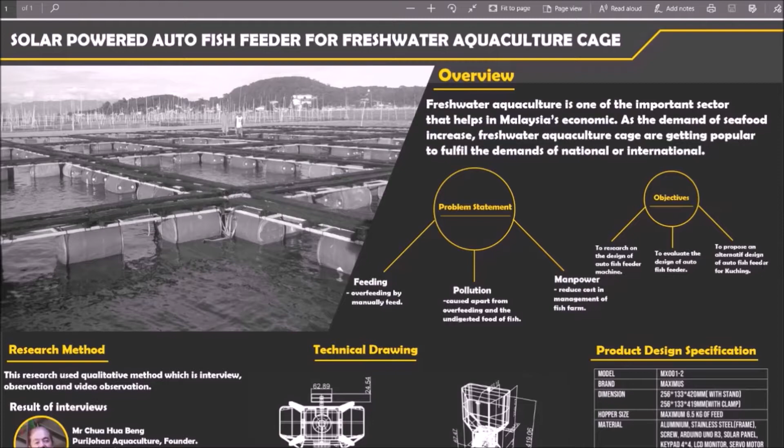The objective is to research the design of the autofish feeder. The second is to evaluate the design of the autofish feeder. The third is to propose an alternative design of autofish feeder for Kuching.

For the research method, this research used the qualitative method, which is interview, observation, and video observation. So I interviewed 3 interviewees, and this is the result.

The first is Mr. Chua Hua Beng. He is the founder of PuriJohan Aquaculture. He said the design itself has to be low cost because his farm is quite big.

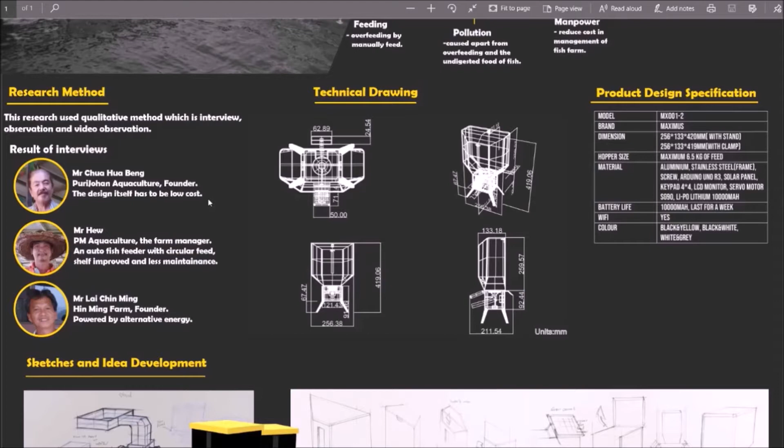The second is Mr. Hew. He is a farm manager for PM Aquaculture. He said an autofish feeder should have the circular feeding function for the fish fry and shelf improvement, and it should be less maintenance.

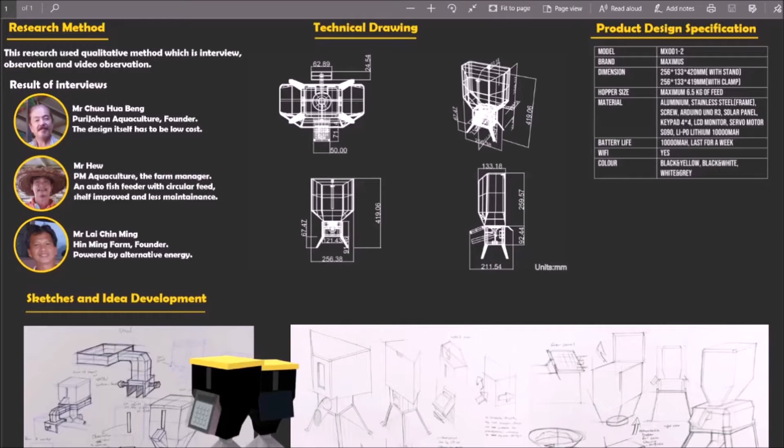And lastly, Mr. Lai is the founder of Hin Ming Farm. He said the autofish feeder can be powered by alternative energy such as solar energy.

Next is a technical drawing. As you can see, it has 4 different viewports: top, front, perspective, and right. All of the viewports are separated by the dimensions in mm.

The next one is the product design specification. For this model I named it MX001-2, and the brand itself is Maximus, because I want this product to maximize itself to the user.

For the dimension, the stand is 256 by 133 width by 420 height. With the clamp, the gauges differ in height by 1 mm, 419 mm.

For the hopper, it can fit 6.5 kilograms of fish feed, and the material of this hopper is aluminium because it's easy to shape. The stainless steel is for the inner frame because it has a stronger property.

Screw, Arduino, solar panel, keypad, LCD monitor, servo motor, and lithium battery. The battery life is 10,000 mAh, and it can last for a week.

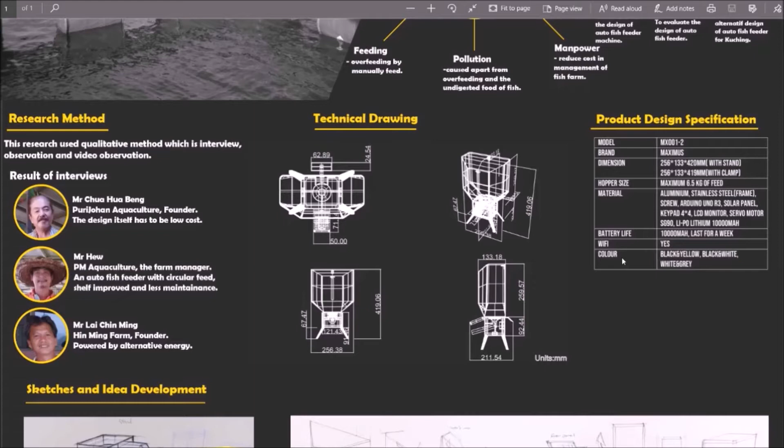Comes to the last part of the infographic, that is the sketches and idea development. This is the first sketch that I proposed, and it was rejected because it doesn't look attractive and it is rigid.

The second sketch: the researcher did research on the drag coefficient of shapes. The lower the drag coefficient, the more stable the product is in windy environments. The result showed the hexagon shape has a lower drag coefficient rather than the square or the cube, so that's why I tried to design the hopper as a hexagon shape.

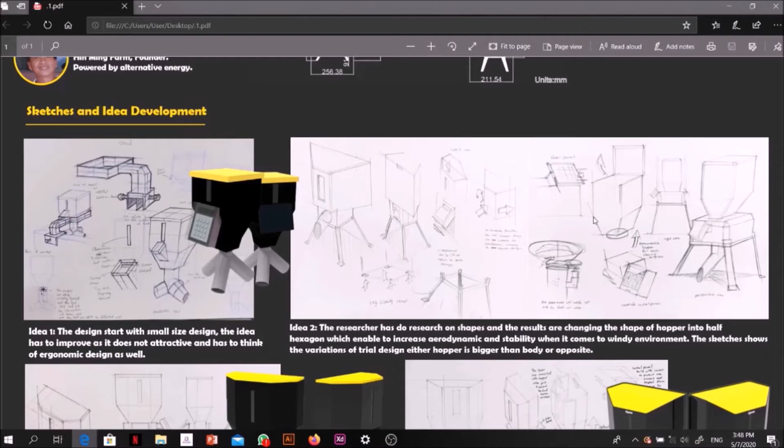The third sketch, I tried exploring what kind of features can be added to an autofish feeder. Comes to the idea three, it's a combination of sketches 2 and 3. As you can see, the design has been improved into a more simple form, but it still looks rigid and has to be changed to more organic modern and a practical design.

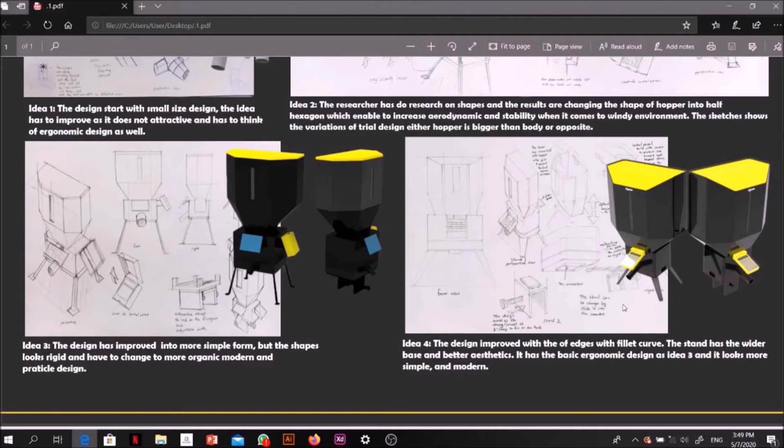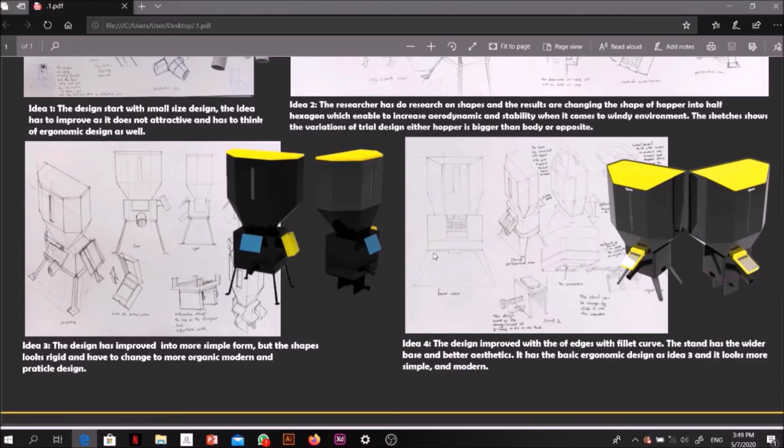Comes to idea 4. Idea 4 inherits the characteristics of design idea 3. It's improved with edges that have a fillet curve, so it's not hard edges, so it looks more organic rather than cubic. It has the function and basic ergonomic design as idea 3, and it looks more simple and modern.

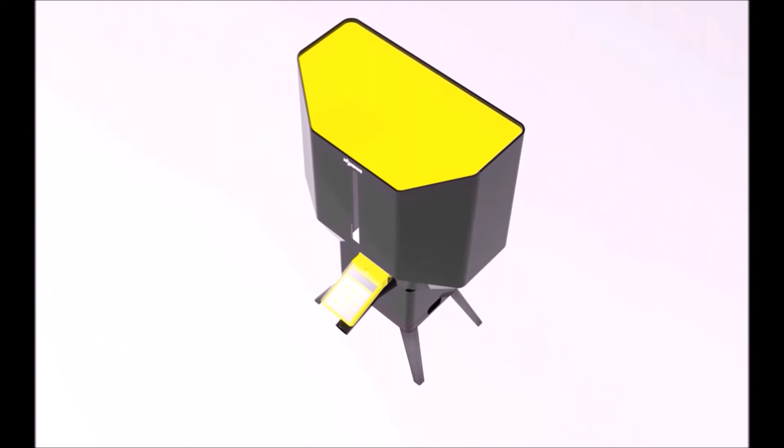This is the overall view of my design from top to bottom. This is an exploded view for the hopper, control panel, body, and the leg.

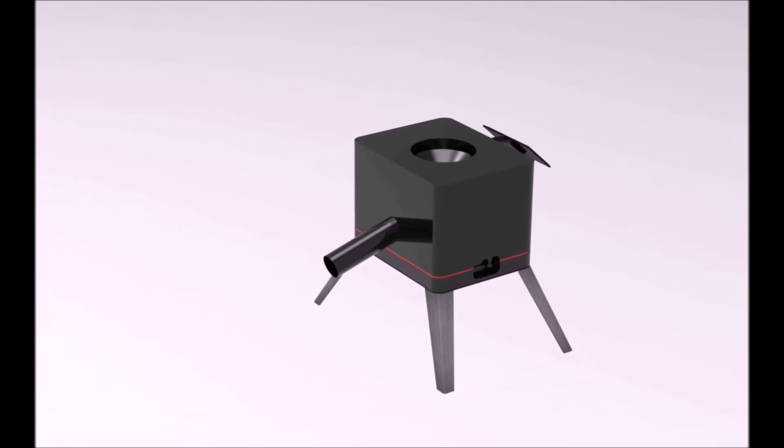Firstly is a hopper. As you can see, the cover can be opened and the middle has a window for food observation, and the hopper is detachable for easy cleaning purposes.

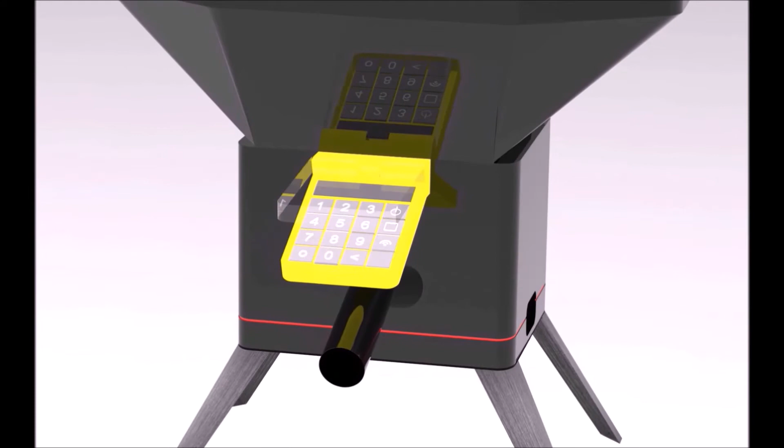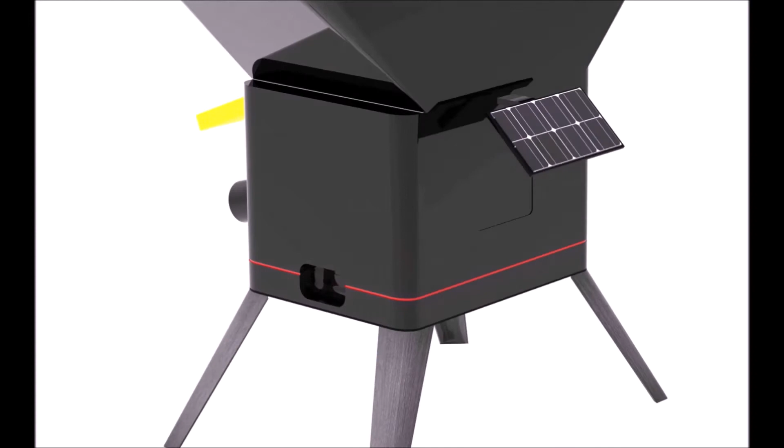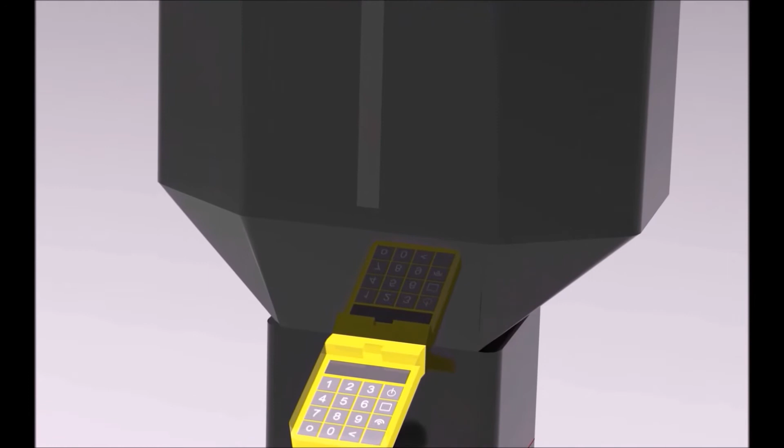This design comes with two types of stand. The first type is a standing still stand, and it's very easy to assemble as the video demonstrated.

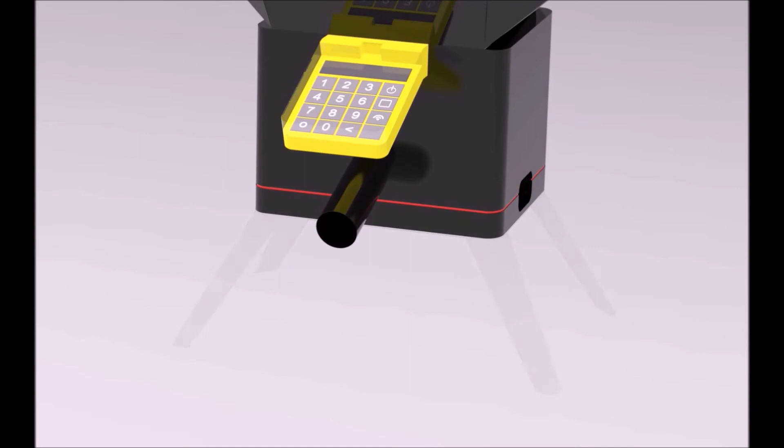The second type of stand is a clamp. You can clamp it on the fiberglass tank, and it is easy to assemble, just sliding through the connector at the bottom, and you can adjust the thickness that you want.

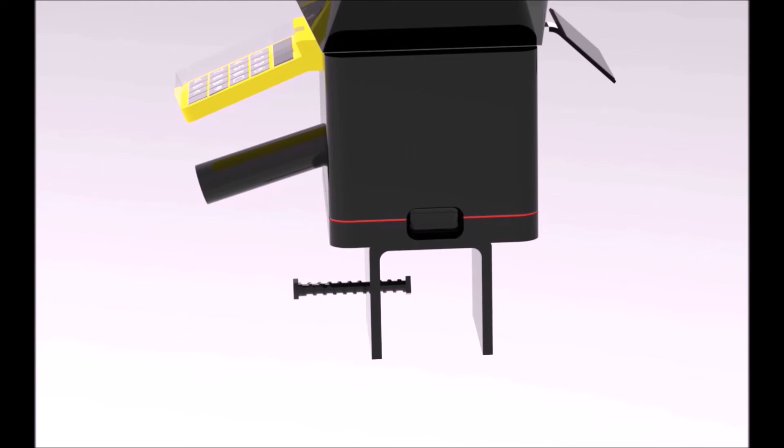There are three variations in this product: black and yellow, black and white, and gray.

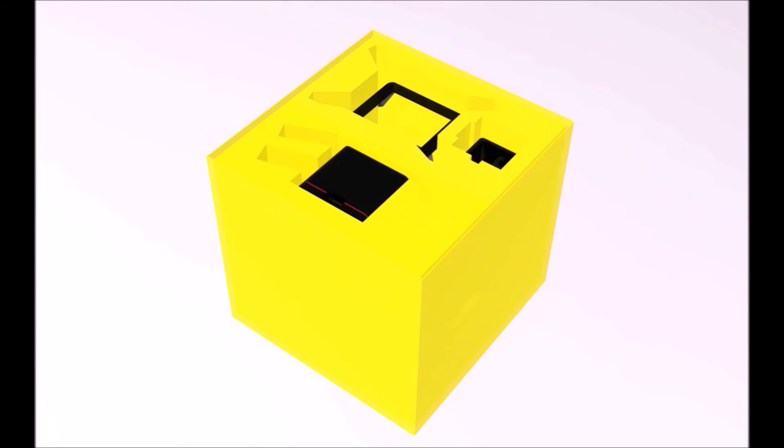This is the packaging design of the autofish feeder. As you can see, it has two layers with three compartments. On the top is the body and the stand, and the bottom is the hopper, the largest compartment.

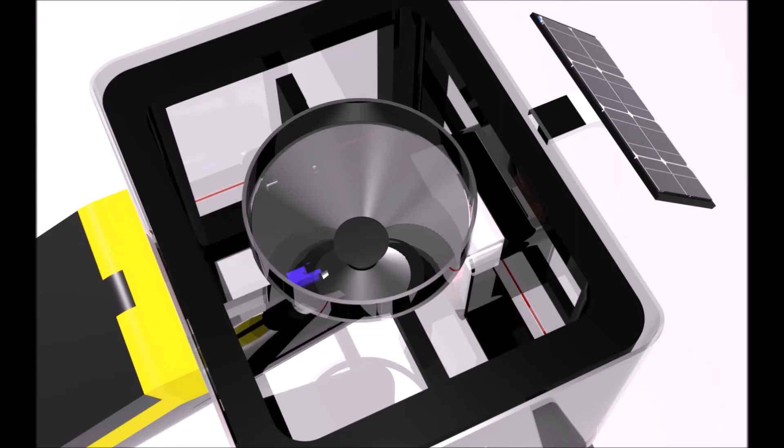This is how it works. As you can see, the black cap blocks the food away from the exit, and it will move 19 degrees when the time is set.

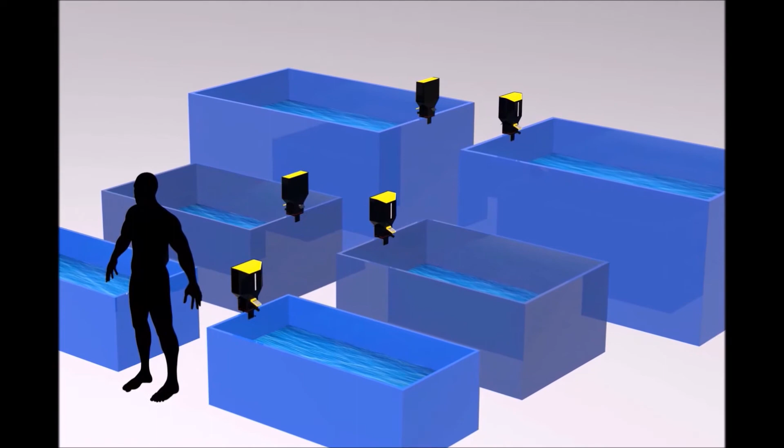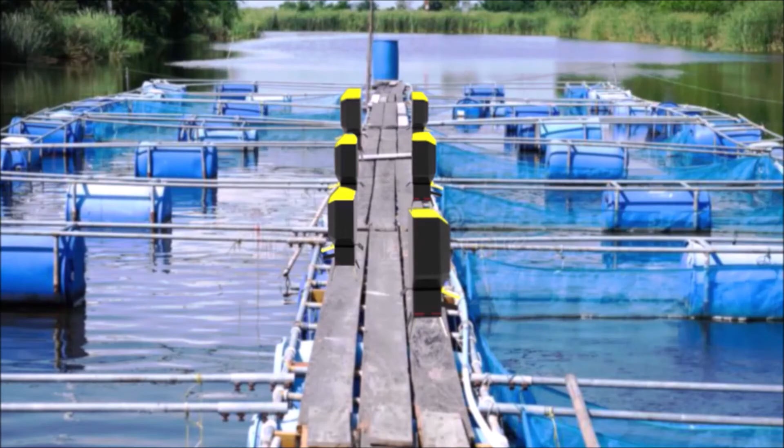This simulation shows how the autofish feeder clamps on the fiberglass tank with different sizes of fiberglass tank. This image shows how it stands still on the fish pond, and this image shows how it stands still on the cage.

So next we will continue to the modeling part. Firstly I will introduce the tools that I use for the modeling.

The tools are a penknife, ruler, and modeling board, 1 ply and 2 ply, and some UHU, and Mr. DIY spray, yellow and black.

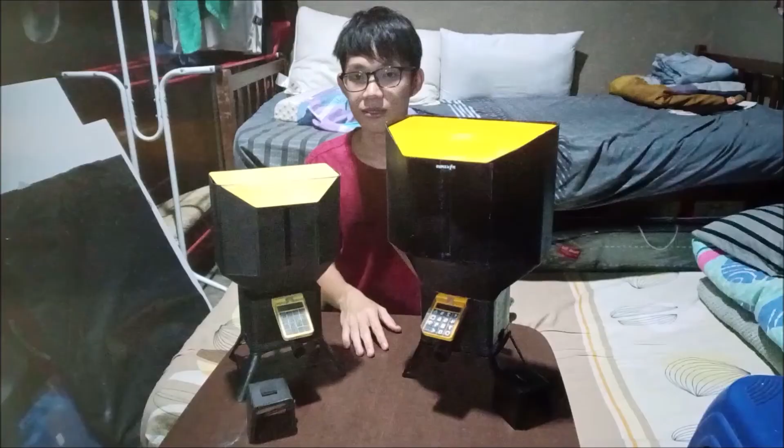After consulting Dr. Saifu, here are the changes that I made. Firstly is the hopper - for this time, the hopper is enlarged compared to the previous prototype. This hopper is approximately 4.5 liters, and this hopper is approximately 6.5 liters. Secondly, I enhanced the stand design. Previously the modeling board was unstable, and this time I use metal material as a stand.

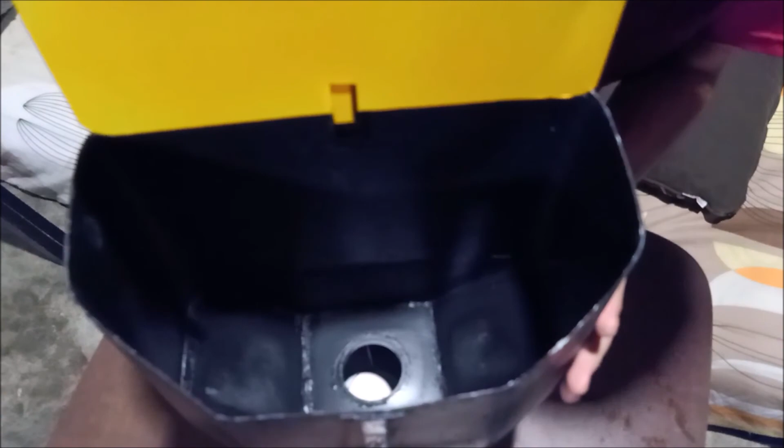So firstly is the hopper. The cover of the hopper can be opened at 90 degrees, and here is a window for you to observe the condition of the food inside. Lastly, this is a detachable hopper for easy cleaning purposes.

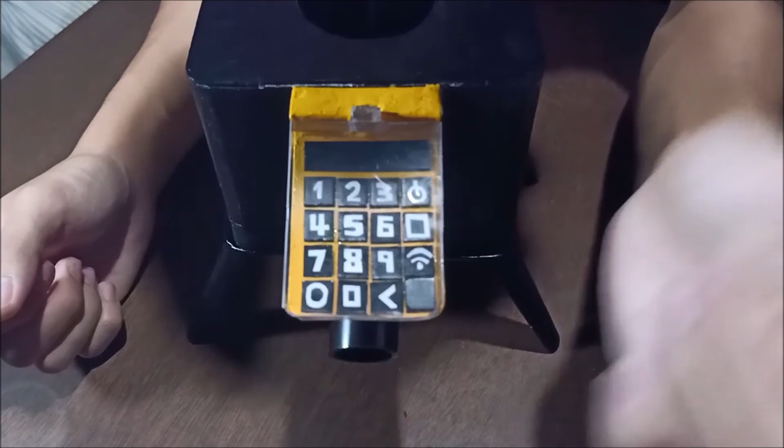So next is the control panel. As you can see here, it has 16 buttons: on/off, program, and Wi-Fi. This one is a backspace, and this one is enter. This is a screen. Moving down, here is the exit for the food, and as you can see, here is a reflective panel.

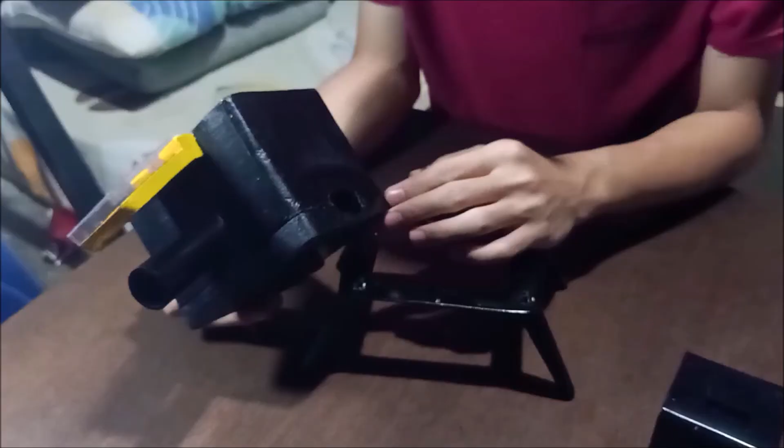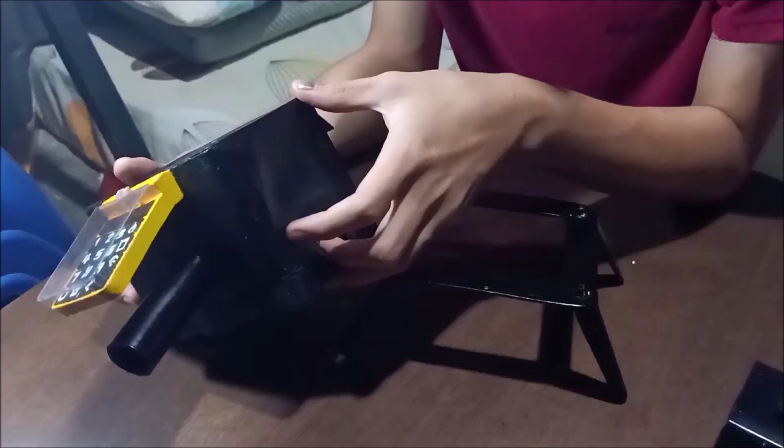Moving to the side, for the ergonomics part, as you can see, here is a space for you to put your finger and increase the grip when you hold it. As opposite from the control panel, here are the solar panels, and here is some printed texture on it.

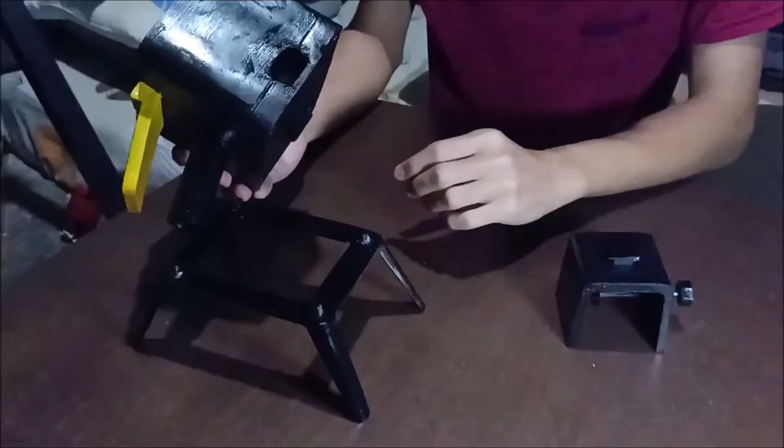For the second type of stand, it is very easy to assemble as well. Just slide the clamp into the connectors at the bottom, just like this, and then you can adjust the thickness that you want, the thickness of the clamp, to fit the fiberglass tank.